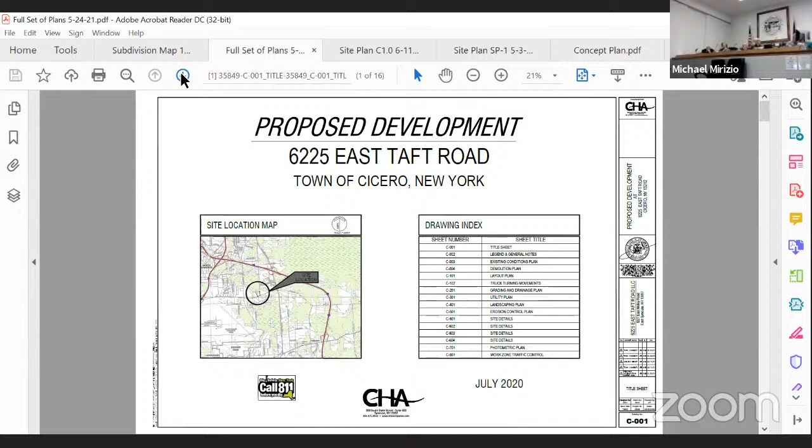It's the existing site with dog daycare along with United Rentals storage. There's some vacant land to the west side of the site. We've reviewed the owner's intent to construct 2 additional buildings for flexible tenant space. Since that time, we've worked with the town's engineer to develop some of the more technical details and respond to all his comments, which we've done a few times, including the stormwater pollution prevention plan and drainage for the site, along with some more technical updates with curbing and such.

We've added, because this is flexible tenant space, there are no known tenants. The intent is to build this and provide a space for somebody to move into. But based on the town's desire to have a statement of what the hours of operation would be, along with providing the building elevations, building materials, and the parking analysis, there is plenty of parking on the site. What we did was use the most strict parking calculation in the GC district for what would be office space, although we don't necessarily limit ourselves to office space.

It could be somebody like an insurance agent, or a trades craftsman like a plumber, anything that would fall under the general uses allowed within the GC district. But because office was the more strict parking calculation, we provided those updates on the site plan as well. So we went through the utility plan, the connections for the sewer, drainage management, erosion control, photometrics, and work zone traffic control for the proposed entrance that will be on East Taft Road.

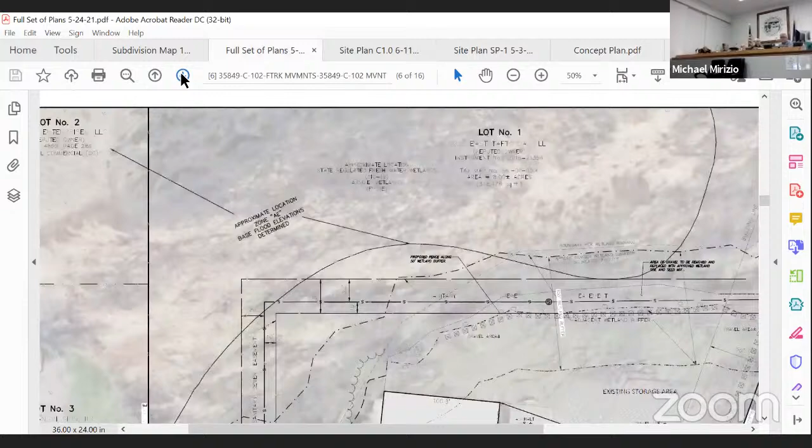You want to review, I think the landscaping plan is new as well. Yes, and if you guys remember, when we were going through some of the site updates for United Rental, there was a series of street trees that we put in at the request of the board. Those street trees are there and planted already, and we reflected that on the new landscape plan as well.

The board's comments was to ensure that there was landscaping up against the building, along the foundation line. So there are entryways for sidewalk connections, and in between that, we've provided a variety of plantings along the base in and amongst those sidewalk areas in front of the building, as well as some plantings along the side and rear of the property.

Open up to questions from the board. Mr. Rosito? Mr. Abbott?

I'm a little concerned about what happens with the area we shouldn't be building in. You put little squiggly marks on a drawing, or some kind of a line there, and it then becomes an issue for our codes people when they go to look at it.

I'm wondering if we shouldn't have some sort of a fence, relatively simple, not as ugly as the orange construction fence, but something that would make it easy so Steve and his crew, when they come, don't have to worry about getting the tape out to check if they're 5 feet off.

Yeah, I do agree with that, and I'm sure you're referring to some of the history that happened in the rear of this property before. So providing—and I'm actually a proponent of the orange construction fence, it's pretty readily available at any site contractor's yard.

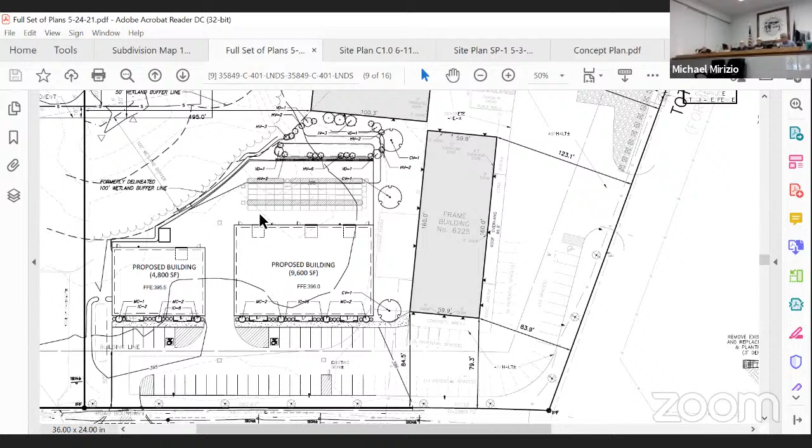And the hours of operation, I know you mentioned them on your comment letter - are they actually on the plan? Yes, we added it to the plan. The intent is 7 AM to 5 PM for that office type of use.

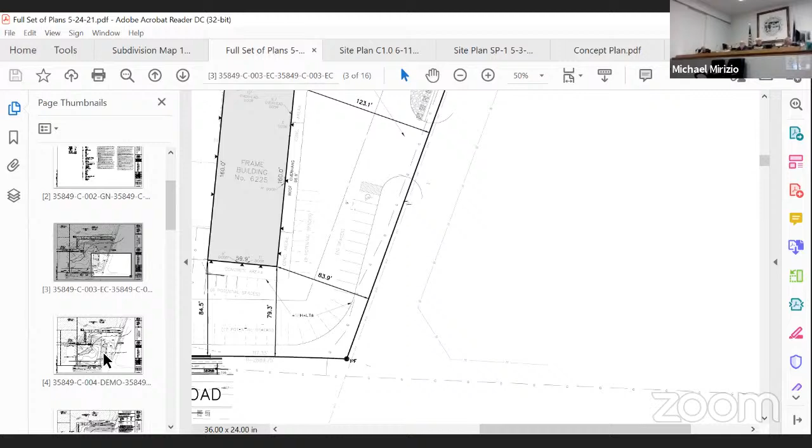And obviously, when the tenant comes in, we also have excluded signage from this, right? We don't know what the signage is, so there will have to be a time when we come back and visit this board. And if the hours change - because the doggy daycare itself is 8 AM to 8 PM - if there's something that changes based on that specific use where they go past 5 o'clock, and it's a business that has to stay open until 7 or 8 PM, that can be part of the amended site plan that would come forward with things like the signage more specific to the tenant. So we can review that individually with you when the tenants come.

Maybe we'll say 7 to 8 PM, if that works, because the other side, United Rentals, is 7 to 6, so it kind of covers what the businesses on site are. So if we could use 7 AM to 8 PM, any use that fits in there - whether it's an insurance agent that may stay open after 5, or just a tradesperson within those hours - I think that would be perfectly fine. Gives you a little more flexibility when you're trying to rent the place; the minute you give the tenant renter time, that helps. 7 to 8 sounds quite reasonable for most. Thank you.

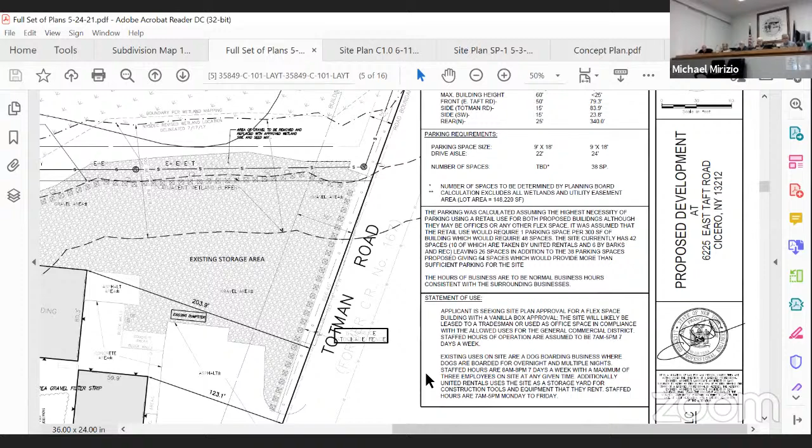Yes, you talked about the signage. The other thing I want to note is that they have some overhead doors for loading at the rear of the buildings, and it's pretty constricted space-wise back here, particularly over here. So they're really going to be limited in the size of vehicles used for deliveries, for whatever use they have there - basically a box truck. The turning movement shown is just a straight truck, a 28-foot long box truck.

So this would be catering more to something like a plumbing supply - small deliveries. There's no reason these types of spaces with this square footage would need something larger than that. The idea is to accommodate that because there is space in the back for it. It's not as much space as you'd like for a loading dock for a WB-67 trailer, but it provides flexibility with the tenant spaces for a service area in the rear, keeping the front parking area clear of deliveries. The larger vehicles can get into the site, but they just wouldn't be able to get behind the buildings for a tractor trailer delivery. Understood, and the owner understands that as well.

So would it be understood based on our conversation here, Neil, or does something need to be? I don't think that has to be any kind of condition. It's just the physics of the site really determine it. Exactly, what I say wouldn't matter. Right, Mark, anything else?

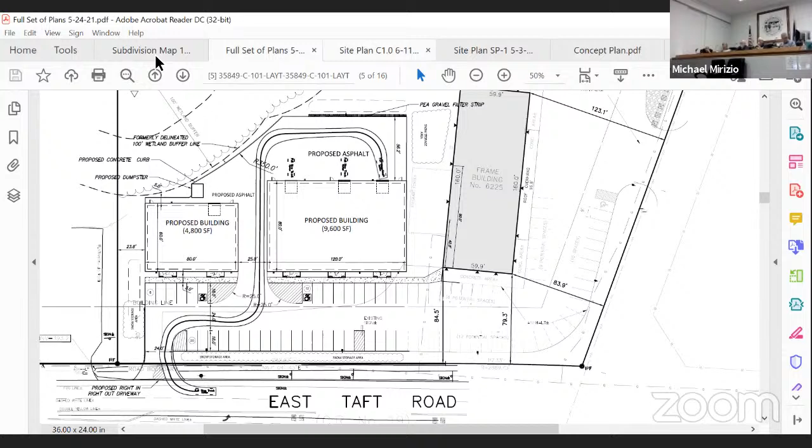Next item on the agenda is cottages at the Garden Grove. This is for the proposed administrative building. Please come up.

We talked about, I think, before, a lot of this has to do with where they're renting space now for the kitchen and for the offices. And they need something on site to really serve the development better. So the building is substantially in the character of the existing buildings that have already been built.

In the interim, we received comments from Mr. Parrish, and we revised the cover sheet of the drawings to include a number of notes in the upper right-hand corner. It dealt with on-site parking spaces, the number of employees, building signage, building use, and hours of operation. There were also other changes made to the site drawings noting the contractor needed to contact the town of Cicero to coordinate connection to the town sewer, as well as the town highway department regarding the curb cut. So those changes were made to the site drawings, which you should have in your package there.

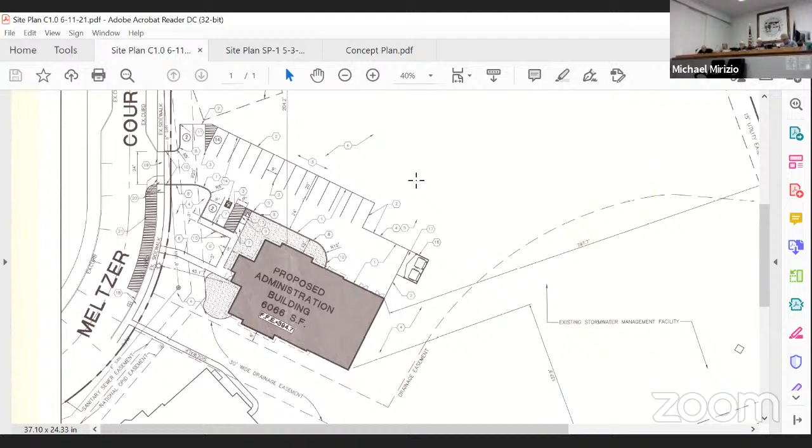Next item on the agenda is for the property at 7808 Brewerton Road. This is a proposed building and site renovation for an Avis facility.

Good evening, Greg Sgromo representing BNF Development Project. Since last time we received a comment letter from Brian Gear, and I think we responded to all their comments. There's a couple of additional questions relative to a lighting plan, which we were just able to get the information on today. It's pretty straightforward. If you'd like, I can hand it out to the board.

I haven't had a chance to look at it yet. I think the only comment that was still open was that we said we're going to leave lighting in kind, but in reality we can't really do that, because the facade is changing so much. The plan is simply to provide, I believe it's six wall pack type lights. They're modern, code compliant for glare, that sort of thing, on the walls around the drive aisles in front, with very little light spillage across the property lines—like 0.1 or 0.2 foot candle for the most part, just enough to light for safety reasons.

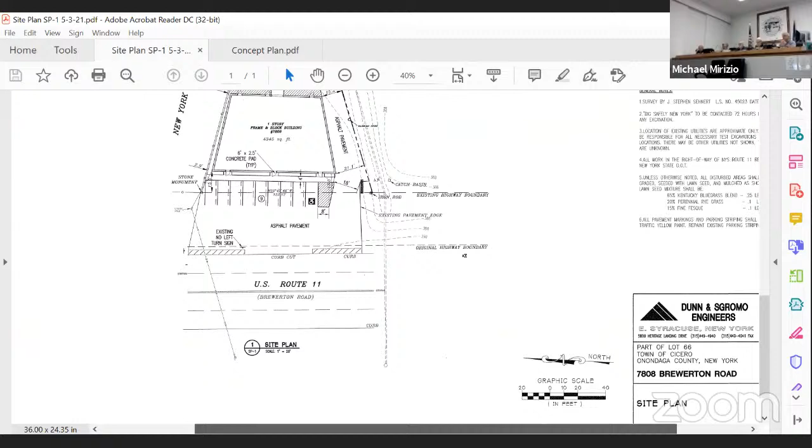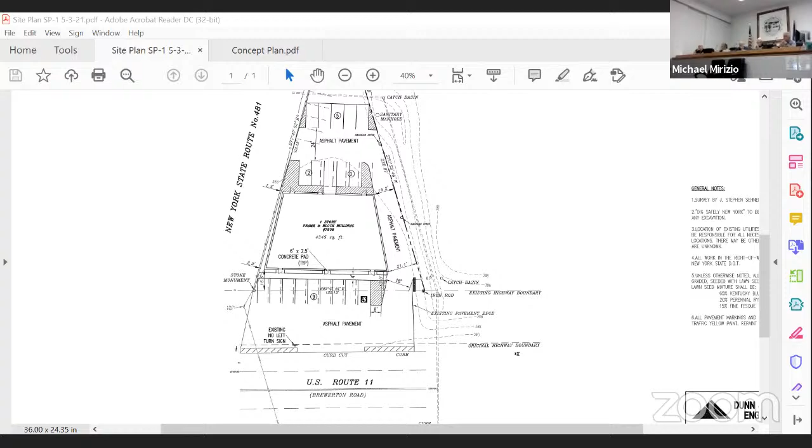There was a concern as far as the number of parking spaces and how the spots on the site were going to be utilized. After talking to Avis, essentially they will have 2 employees on site at any given time, 4 employees total for the whole facility, but only 2 on site at any given time at most. So that's 2 parking spaces there, maybe 4 at the most for clientele. They're expecting about 10 to 15 transactions a day, so spread out over the time period, you're really only talking maybe 1 on average per hour, though sure, you're going to bunch up in the morning kind of thing. And 3 vehicles indoors for detailing purposes.

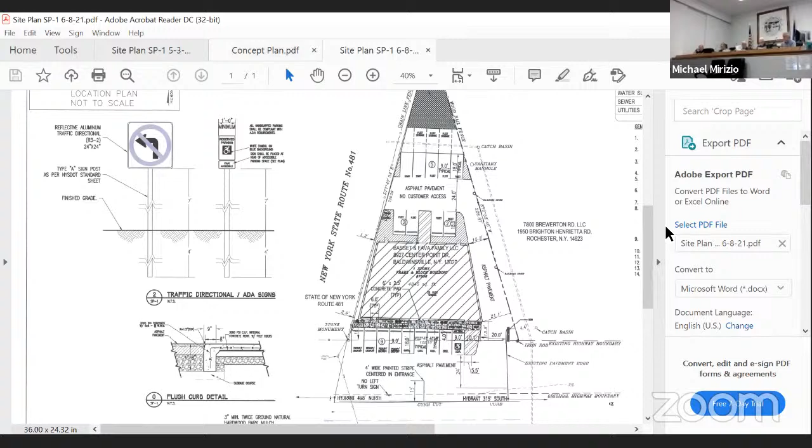So these cars, they come in and get detailed on site. There's no repairs like oil changes or brakes. If there's something very minor, like a light, it might be something like that, but nothing more elaborate. The remaining spots are for storage of fleet vehicles. They do have 3 in the back that are double stacked, but again, those are long term.

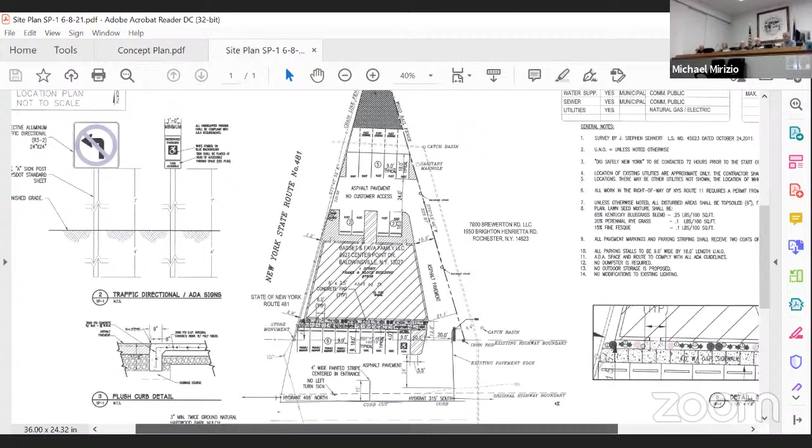And you mentioned they need more cars, or maybe different vehicles. They rotate around off site to the airport, shuttling back and forth. So whatever's on site, they feel like that's just fine.

The Department of Transportation, we gained a permit for them a few years ago, and there's no changes to the access or number of cars in front or how the cars are parked. And they have a lease agreement with New York State DOT for maintenance in front of those, for usage of it, which they've been paying on for years. I think we got that back in like 2013 or something like that. And we provide documentation in that respect.

We will sign the handicap space. I think we've got it shown now on the plans for ADA requirements. And the sidewalk in front of the building is for ADA compliance standards, it is concrete. We've labeled the typical dimensions for the parking spaces there for council.

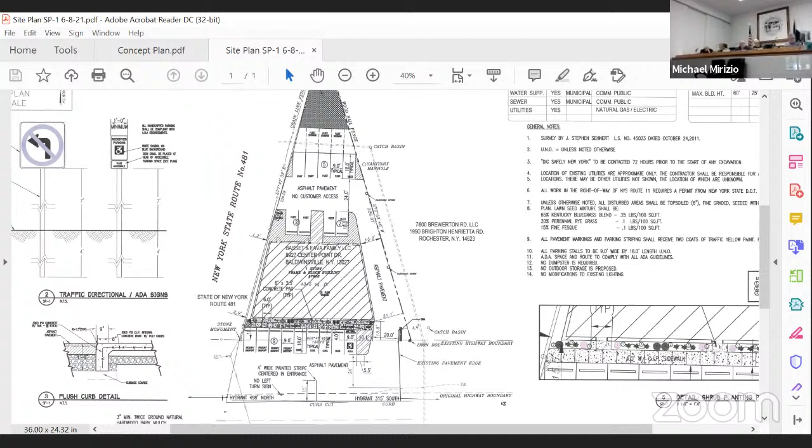We don't anticipate any modifications to utilities whatsoever. There's power, water, sanitary sewer service, that sort of thing. It really is very, very minor site modifications. Right at the front of the parking spaces, we're going to add the sidewalk and the planting in the front. We're going to remove asphalt in the back where it's not necessary, to reduce impervious area of the site. Other than that, we really don't anticipate any additional paving or changes in the site. There will be asphalt, that sort of thing, but nothing that dramatically changes the characteristics as far as water flow.

We've put the name and address of the owner and adjacent property owners on the plan. We have provided a table with bulk regulations for the site. Hours of operation we have in our letter, and if the county wants them on the site plan, that's not a problem, we can do that. But we figured if there are any other comments, we could address them all at once.

Landscaping details have been provided now, along with proposed lighting. We prepared that plan for you. If there are comments or modifications, we'll make those. I'd be happy to do that.

The freestanding sign, we do not know what their intent is for that, but they're going to come in and do something with that with you guys. Their sign guy will typically come in and do it as a separate permit. I thought there was something submitted with this for signage. Yeah, the sign, for the pylon sign, the square footage for the pylon sign and the wall sign is still under the maximum for the building. It would be simply Avis on the pylon sign and Avis on the wall sign.

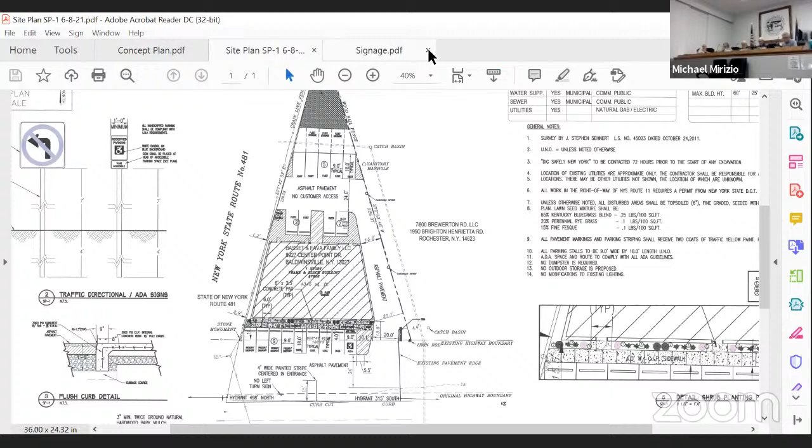Evening, my name is Glenn Steenberg, I'm the engineer from the applicant, Liberty Restaurants. We have a proposal for a Popeyes restaurant located at 7980 Brewerton Road. The parcel is located just south of the Dairy Queen and just west of Marshall's, Five Below plaza. There's a wetlands there. The parcel is approximately 0.8 of an acre in size and is in the general commercial zone.

It's proposed to construct a 2,145 square foot fast food restaurant with a dedicated drive-through lane that splits into 2 lanes for ordering kiosks, then funnels back down into 1 lane for pickup. It seems all of the fast food restaurants are going through this drive-through style. They can actually get the food prepared faster than they can order the food, so the 2 kiosks help them get more cars through the drive-through lane than in the previous setup, which was just a single dedicated ordering kiosk and drive-through.

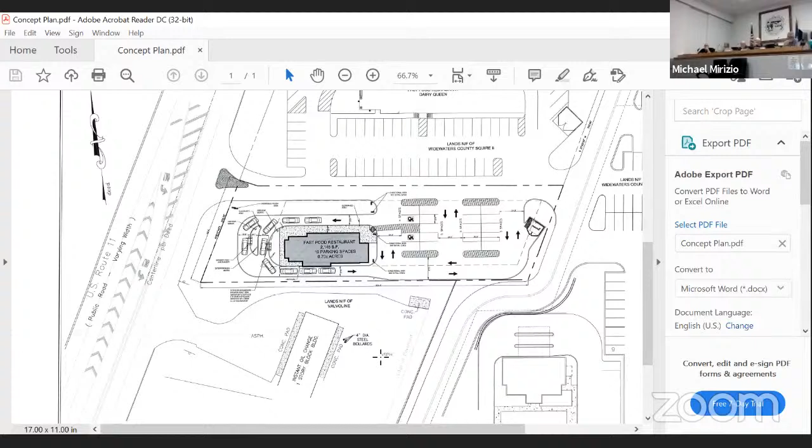However, we did approach Widewaters Group to ask if there's some possibility to acquire shared parking with the retail center behind it. They did basically permit us to offer that up, so that if parking spaces are full, people can use the parking spaces in front of Marshall's. This plan doesn't show it, but we've started working on generating a plan with a crosswalk to provide safe pedestrian access to the parcel from that parking lot, in case they need those overflow spaces. However, the applicant feels very comfortable with the 12 parking spaces, as they tend to do more of their business with drive-through these days than sit down within the restaurant.

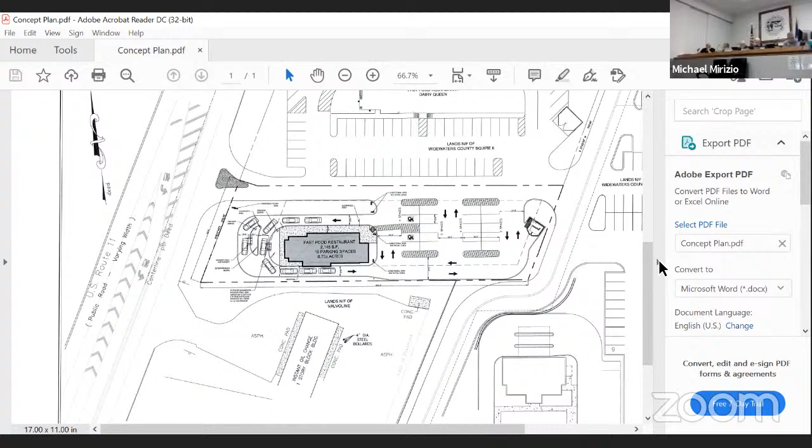We did, as you can see, locate the dumpster in the rear of the parcel, very similar to the way Dairy Queen has their dumpster location, almost identical. I apologize, I should have brought my laser pointer. I did speak with Mr. Procopio before we submitted the plans, and he recommended the dumpster be pushed right up to that intersection a little further north. We moved it south a bit to increase sight distance for vehicles stopping at that intersection. That intersection is a full all-way stop, all three directions, with stop bars at each location and stop signs at least two of the locations.

We show the 2 handicap parking spaces right behind the building, which obviously have to meet ADA standards. The site was originally designed from a stormwater management standpoint, basically sheet draining to the southeast of the property. There's a culvert running between the Dairy Queen and underneath the access road, into the facility stormwater management system, which runs due east through the parking lot, and that will be maintained in accordance with the original design plans.

So we're here for sketch plan approval. We really want to get your ideas on how you feel about the project, and make any changes and modifications as necessary before we move forward.